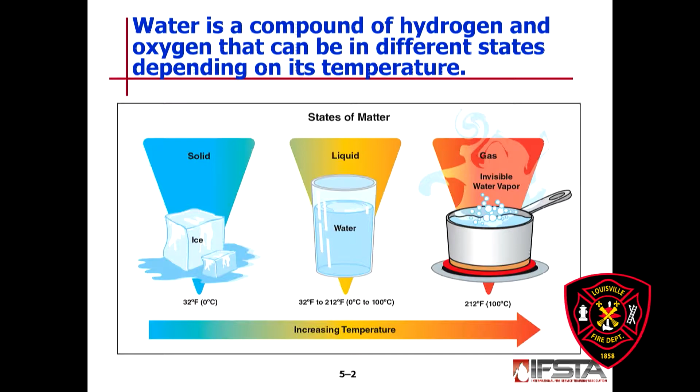What do we know about water? Why do we use water on fires? We know water per gallon is weighed at 8.3 pounds. We know we use water as a cooling mechanism and a smothering mechanism.

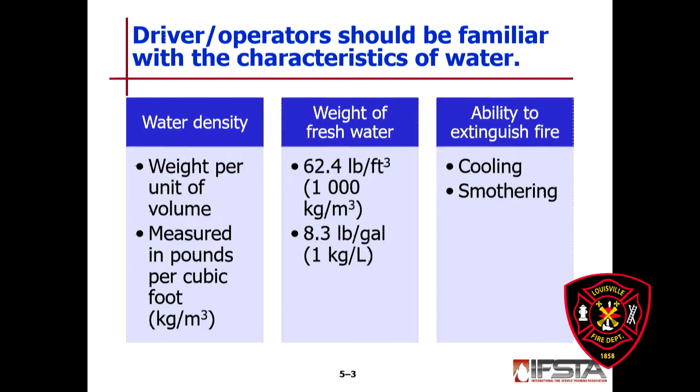What are ways that water can extinguish fire? We just went over that in the previous slide: cooling and smothering. Advantages of water.

We know water is generally inexpensive and we have lots of it. That's why we might use water. It has a greater heat absorbing capacity than many other common agents. We know that steam dissipates heat in well-ventilated rooms due to an increase in volume.

So why do we use water? Probably the most important thing is right here: it's generally inexpensive and readily available.

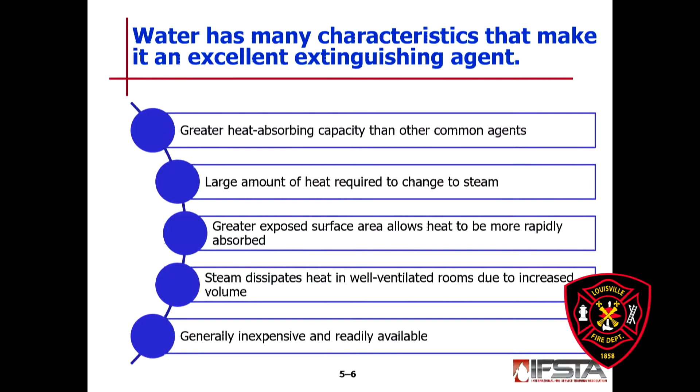So what are the disadvantages when we use water? We know that water is reactive with certain substances, i.e. magnesium. We know it may create operational problems or safety hazards in cold weather.

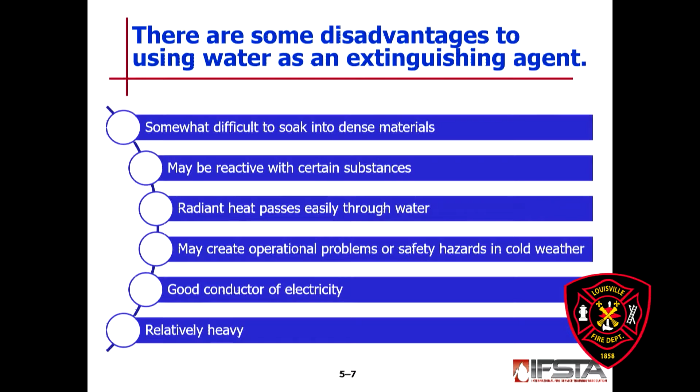So in the wintertime, we know our water can freeze. You flow in a lot of water, so you got ice in front of your structures, ice in the streets, ice around your apparatus, ice on your ladders and your elevated master streams. So we know that can be a disadvantage when water freezes.

And we know the water is heavy, so water can put a lot of stress on your buildings the longer the incident goes, making those structures not as stable as when we first got there. So advantages and disadvantages, we just covered.

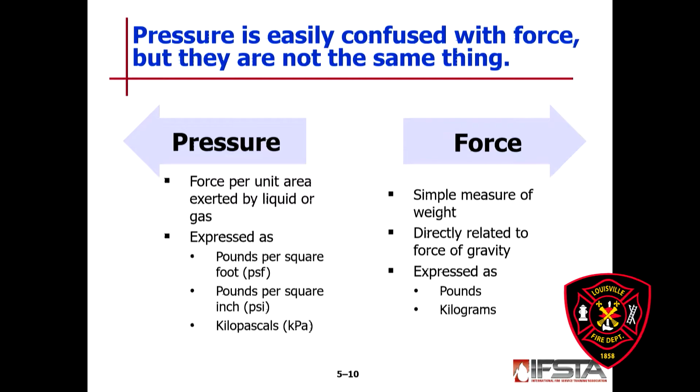Facts about water: pressure and velocity. Now, pressure and force are similar, but just slightly different. Pressure is a force per unit area exerted by the liquid or gas. It is measured in pounds per square inch, or PSI, and force is a simple measure of weight, directly related to force of gravity. So what we know here is pressure upon the fluid plus the size of an orifice that it flows through is going to determine the speed that water comes out of that hose or that pipe.

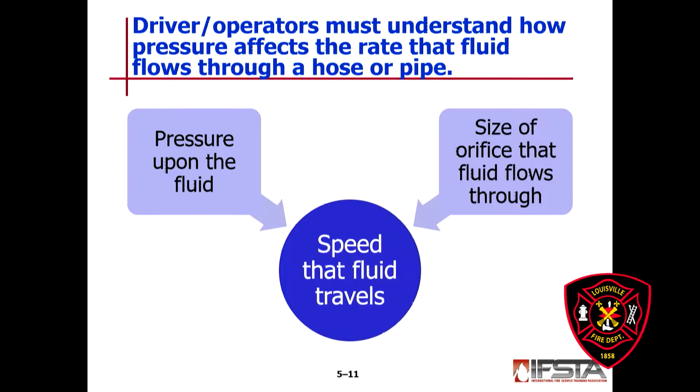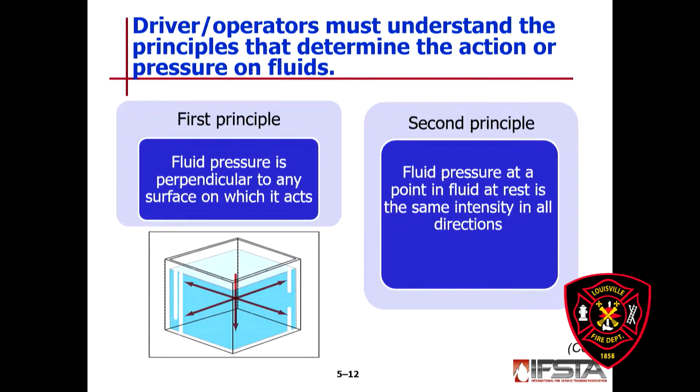Principles, these are found in your book. There are 4 principles, okay? Look over that. I'm not going to go over that right now, but it will be fair game for the test. These are principles. Basically, it tells you that whatever container or whatever the surface is, the water is going to take on that dimension.

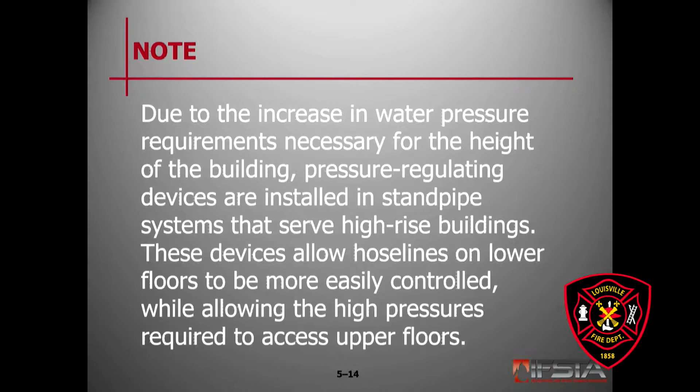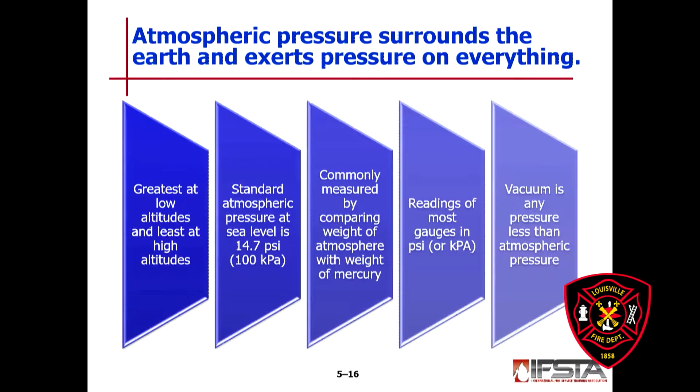6 principles, I'm sorry, not 4, 6 principles. All right, atmospheric pressure. We know that the atmospheric pressure here on Earth is 14.7 at sea level. Anything below that, a vacuum, and any pressure less than your atmospheric pressure is going to cause a vacuum, okay? It is greatest at low altitude and least at high altitudes. So atmospheric pressure surrounds the earth and exerts pressure on everything, absolutely everything.

We talk about head pressure. So in this illustration, we have our water supply up here, okay? It's 100 feet above our hydrant, okay? So we ask ourselves, how do we get to this hydrant pressure of 43.4 psi? Well, for every 1 foot of elevation, you're going to multiply that by 0.434, okay, and that will give you your hydrant pressure. So 100 foot times 0.434 is going to give you what you're going to get out of this hydrant if your water supply is 100 foot above your hydrant.

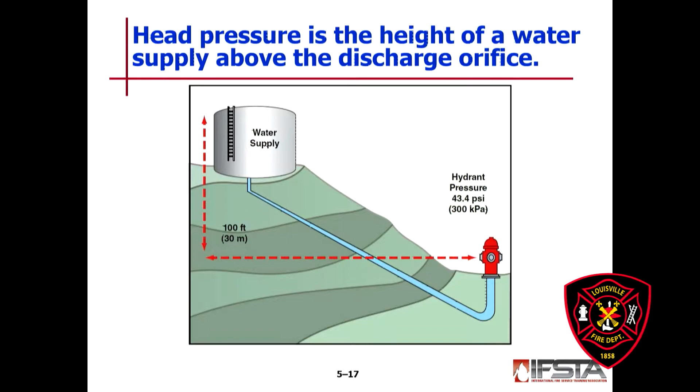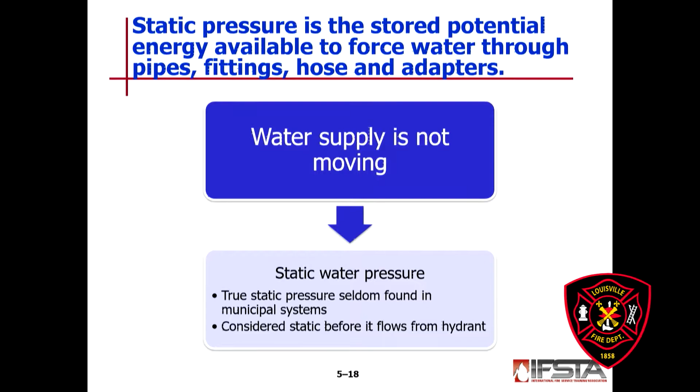Static pressure is a stored potential energy available to force water through pipes, fittings, hose, and adapter. Water supply not moving is what we call static pressure.

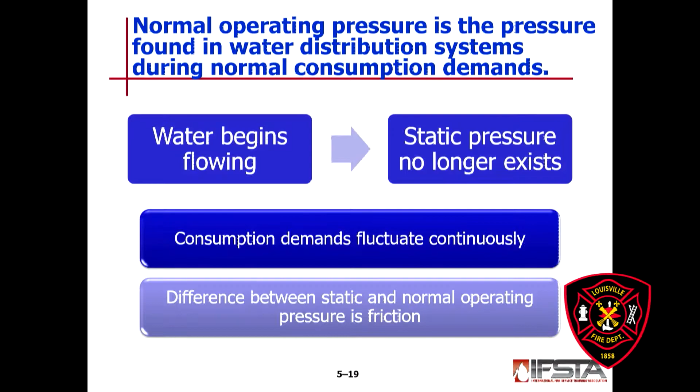Once water begins to flow, once you turn on a hydrant, turn on your faucet, once water begins to flow, it's no longer static pressure and it has to overcome friction.

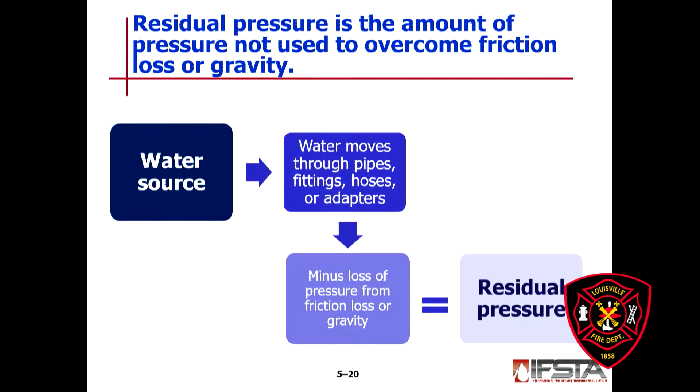Residual pressure is the amount of pressure not used to overcome friction loss or gravity. So you have a water source, and as water moves through the pipes, the fittings, and the hoses or adapter, you got to subtract the pressure from the friction loss or gravity, and after you do all of that, you will come to your residual pressure.

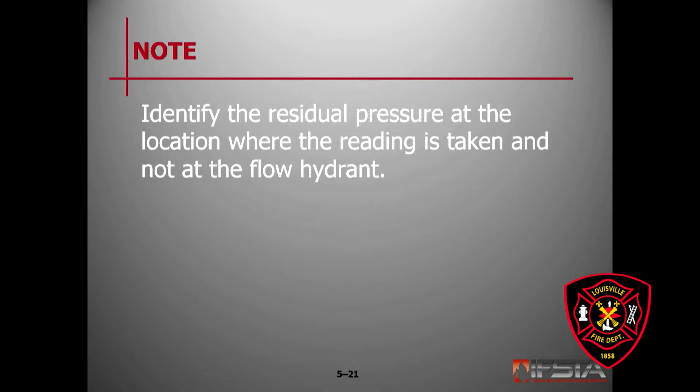Identify the residual pressure at the location where the reading is taken and not at the flow hydrant. So you won't, if you're trying to look for a residual pressure, you're not going to get that at the discharge of the hydrant. You will get that at the end of the nozzle once it flows through your hoses.

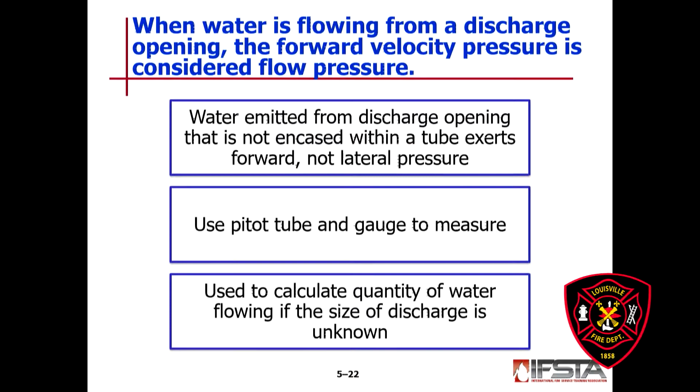When water is flowing from a discharge opening, the forward velocity pressure is considered flow pressure. You will measure that with a pitot gauge, and it is used to calculate the quantity of water flowing when the size of the discharge is unknown. When measuring the forward velocity of flow pressure using a nozzle, a smooth bore nozzle must be used with a pitot gauge.

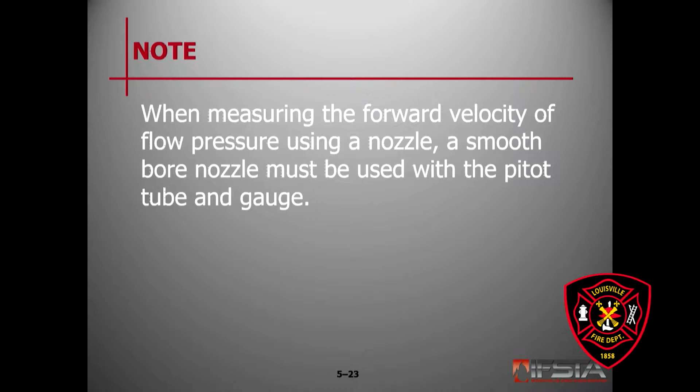Okay, in this slide, we're talking about elevation and altitude. The higher the elevation, or the higher the nozzle is going to be, then you're going to lose your pressure. And if your nozzle is below the pump, you're going to gain pressure.

And then in altitude, the higher the altitude, the higher you are up, the harder it is to produce an effective stream, versus the lower you are in altitude, it'll be easier to produce a good stream.

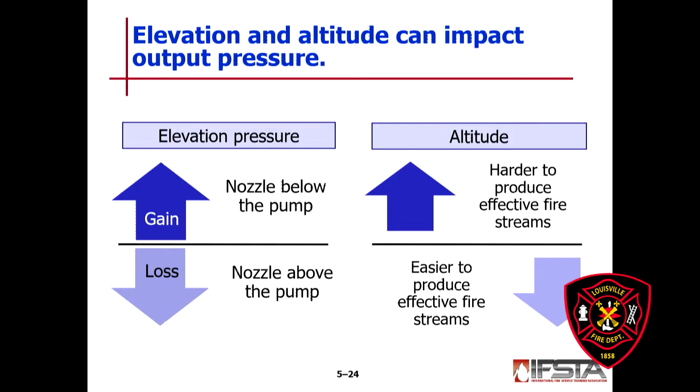A certain amount of pressure is lost due to friction as water moves through pipes, fittings, fire hoses, and adapters. So anytime water has to overcome anything—a pipe, length of hose, fitting, couplings, nozzle—pressure is going to be lost.

Different types of pressure, and talking about the principles of friction that are found in your book, there are 4 principles of friction. I'm not going to go into great detail about those. Those are found in your book, so please read them. I'll just read maybe the first and the fourth.

The first principle: if all other conditions are the same, friction loss varies directly with the length of a hose or a pipe. So if we have 2 pumpers into a hydrant, getting the same amount of hydrant pressure, goes through the pumps, out through the discharge at 200 feet of 1 3/4, everything remaining the same, you're going to get the same amount of pressure. If anything changes, that pressure will be different for each of them.

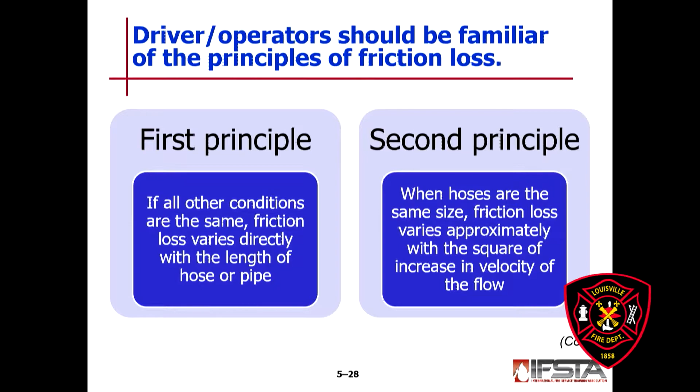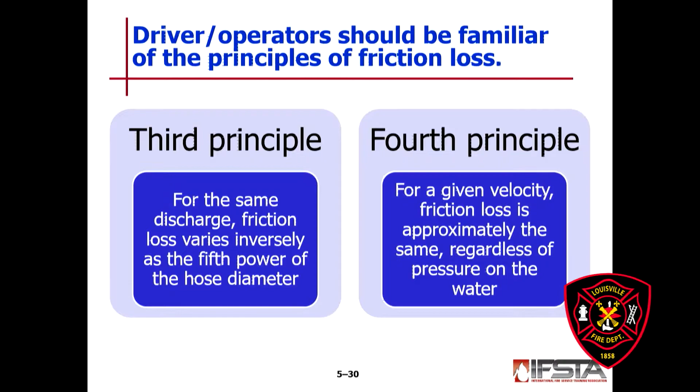Fourth principle: for a given velocity, friction loss is approximately the same regardless of the pressure of the water.

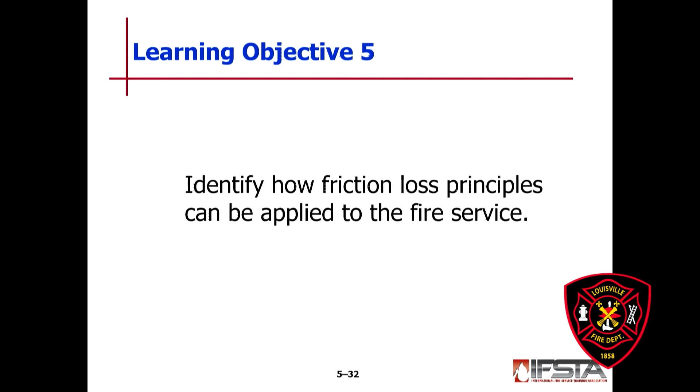Identify how friction loss principles can be applied to the fire service. So the volume of water supplied into a fire hose under pressure is going to equal the volume of water expelled from the nozzle. That's pretty self-explanatory.

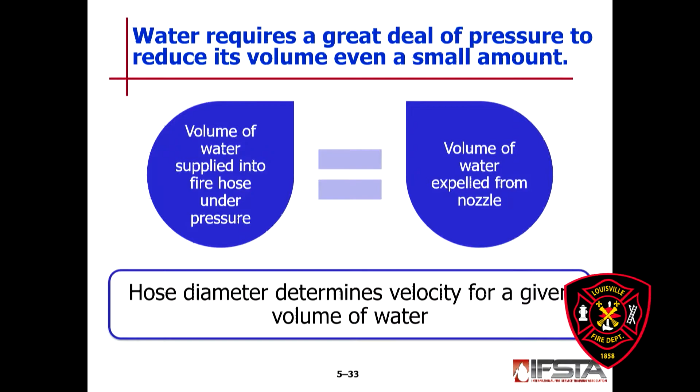We get water in, we get water out, it's going to be the same volume. Hose diameter determines velocity for a given volume of water. So the bigger the hose, the more water we'll get. That's basically what that slide is saying.

We need to be aware how friction loss and water pressure are affected by hose length and nozzle use. Friction loss increases as the length of the hose lengthens. So the longer the hose, the longer that water has to overcome friction loss.

Flow pressure is always greater at the source of supply than at the lowest or farthest point of the system. So if my pumper's here with 100 feet of hose, then I turn on the nozzle, my flow pressure is going to be greater than if I had 500 feet of hose and I turn on the nozzle and take my pressure there.

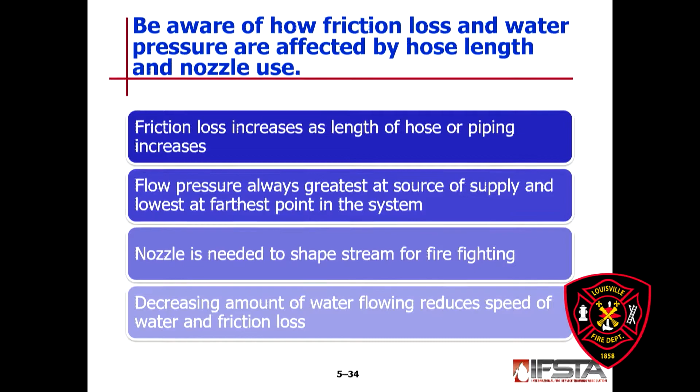A nozzle is needed to shape the stream for firefighting water. We know that. And decreasing the amount of water flow reduces the speed of water and friction loss.

What will happen then is you will either need to use a Siamese or use two different hoses to overcome the friction that will be going through that system.

Friction loss in a system can be reduced in several ways. We talked about this—hose length. We can reduce the length of the hose. Oh, excuse me.

Too fast for myself. You can reduce the length of the hose or you can increase the diameter of the hose. So the bigger the hose, the less amount of friction you're going to have. That's there. Or watch for sharp bends or kinks.

So we know that sometimes hose gets kinked in the yard, in the door, or wherever. So always look down, especially if you're coming in behind the hose man or the nozzle man. Look down, unkink hose if you see a kink, because it's going to affect the amount of water he's getting at the end of the hose.

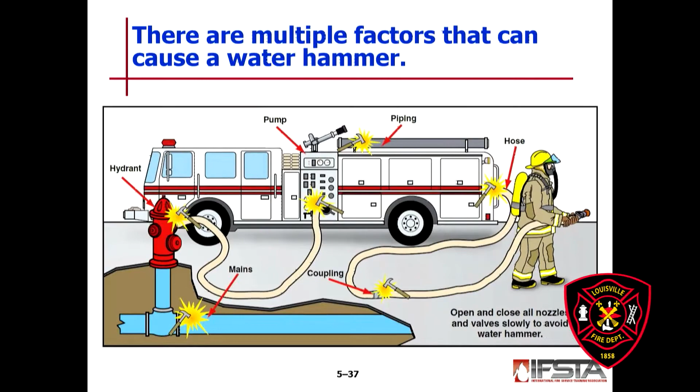There are multiple factors that can cause a water hammer. When we're talking about water hammer, we're talking about opening or shutting any kind of gate or discharge, and we know that can be found here at the nozzle, here at the discharge, or here at the hydrant. This picture illustrates different ways where water hammer can occur. We want to try to reduce that as much as possible.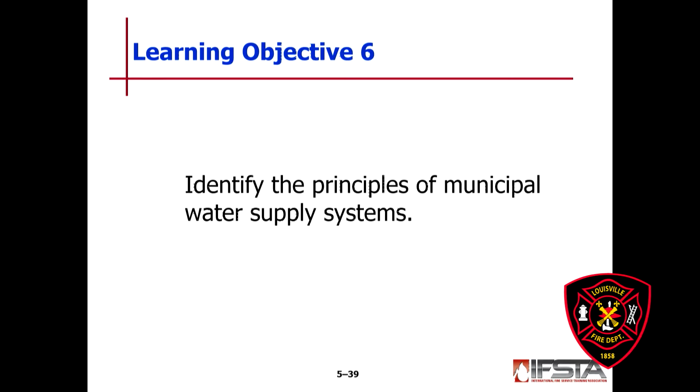Identify the principles of a municipal water supply system. We know that in this city, at least, we have the Ohio River, and so that is going to be our main water supply.

The fire department and local water department get together, some engineers get together, and they plan where the mains are going to be in the city, where hydrants should be placed, how far apart they should be placed. In your first and second district, they're more closely together. Once you get out in the fourth district, those hydrants are a little bit farther apart, but that is above our pay grade.

We really don't determine that, but just be aware of that.

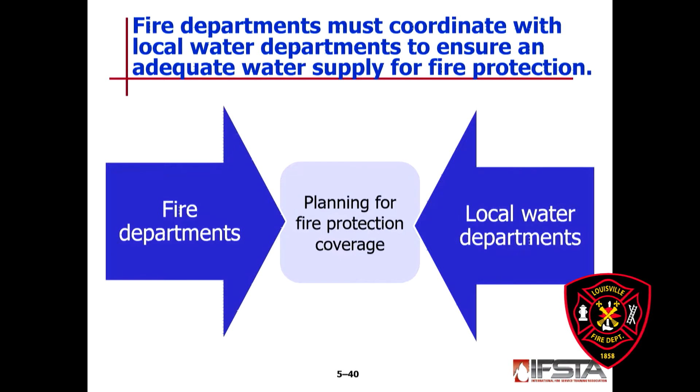A municipal water system may be supplied by groundwater, surface water, or a combination of both. When we talk about surface waters, we mean rivers or lakes - for us, that river is the Ohio.

When we talk about groundwater, we're talking about cisterns, water wells, or water producing springs.

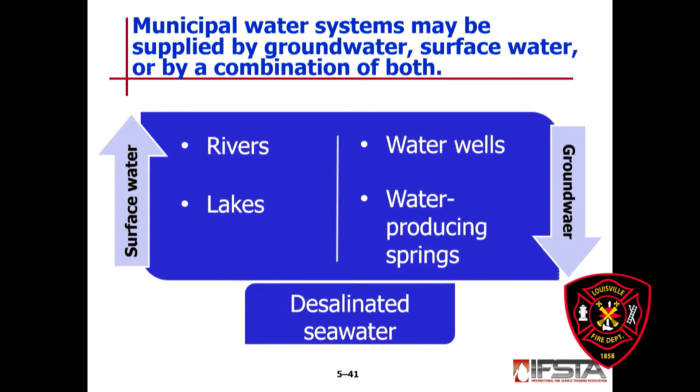So now the question becomes, how do we get the water from the river to our hydrants? There are three methods of moving water in a system: direct pumping, the gravity system, or a combination system.

In the picture illustrating the direct pumping system, you have the source, which would be the river here. It comes into the filtration, goes into the pumping system, and out through the city.

This illustrates the gravity system, where your water source is above all of this. It's fed by gravity, comes down into your filtration or treatment center, and then out through your distribution system.

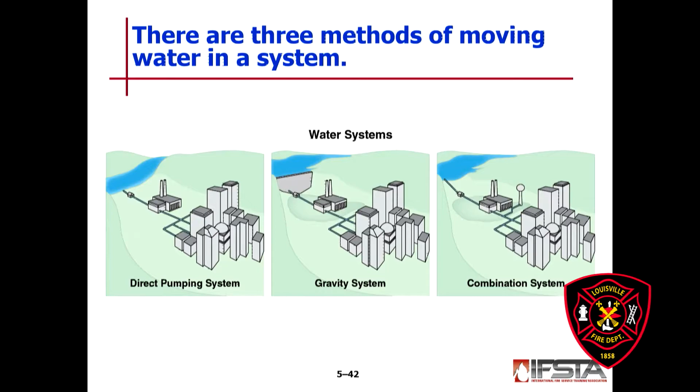Here you have an overhead storage tank. The water isn't as high as in the gravity system, but in a combination system, water comes down slightly, goes into your filtration system, and then out through your distribution system.

Water may be stored in an elevated reservoir to ensure water supply when the system is inoperative. In this last picture, you see the elevated storage.

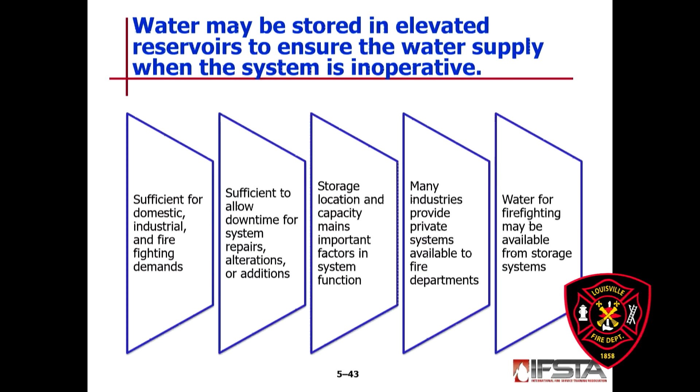These are found maybe in your chemical plants or in some of your bigger companies, where there may come a point where our water system becomes ineffective or not operable.

You will have these, and this water can be used for firefighting. It can be used for production of whatever they're making at that particular plant or company, or it can be used for toilets and things like that.

The fire department must be aware of situations with water treatment plants that could affect the water supply. We've got to plan for a potential shortfall.

With the river here, I don't think we have to plan for that much, but we also have to plan for maintenance failure, natural disasters, power loss, and of course, if there's a fire.

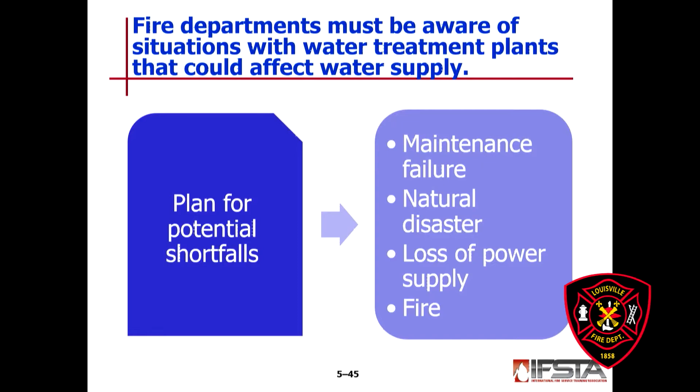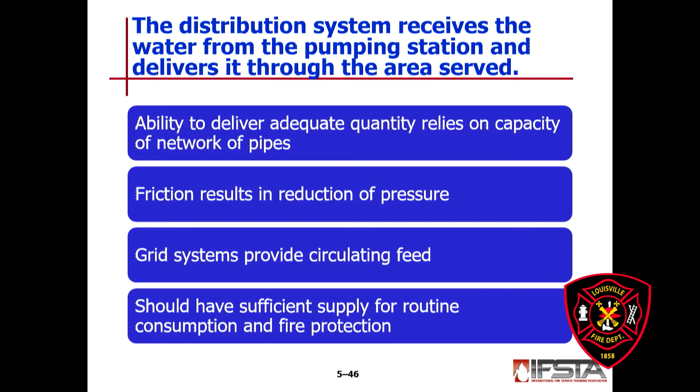The distribution system receives the water from the pumping station and delivers it through the area that it serves. The ability to deliver adequate quantity relies on the capacity of a network of pipes, mains, or grid systems.

Valves should be operated at least once a year and should be located at frequent intervals throughout a grid system. Louisville Water Department throughout this city has large grid systems.

You should get to know some of those in your district and area. They're electronically monitored, so if we have a main break on Eastern Parkway - which we've had a couple years ago - or even down on Main Street, or in the 2nd District, I think we had one over by Shelby and Oak.

When something like that happens and there's an increase or decrease in pressure, I'm sure some alarm or light goes off in their control center.

They should then be able to use their computer system to pump water from other grids to make sure areas are getting service.

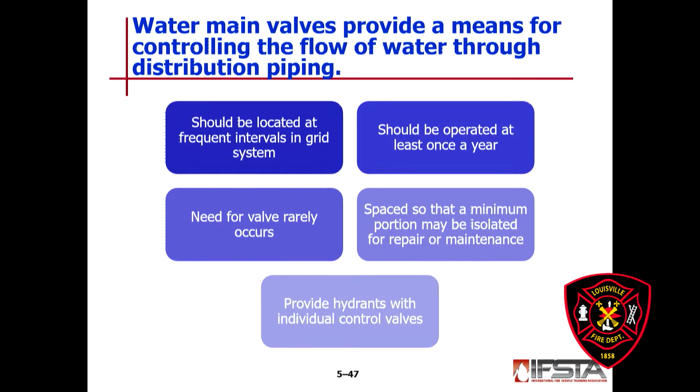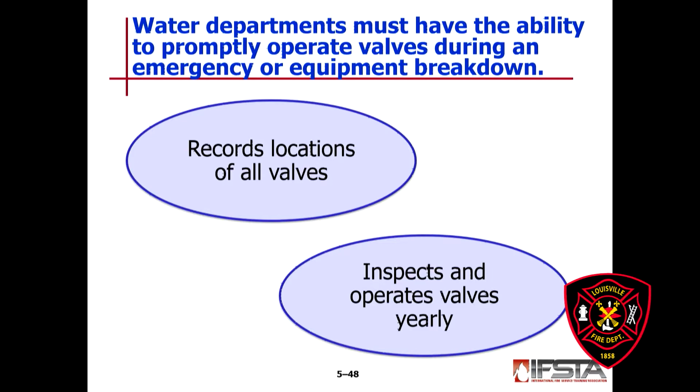Or they can shut off water in the area where the break is, so it's not feeding and causing more damage than the break itself. Water departments must have the ability to promptly operate valves during emergencies or equipment breakdowns.

Valves for a water system are broadly divided into two main types: indicating valves, the two types we should be familiar with being the post-indicator valve and the OS&Y valve.

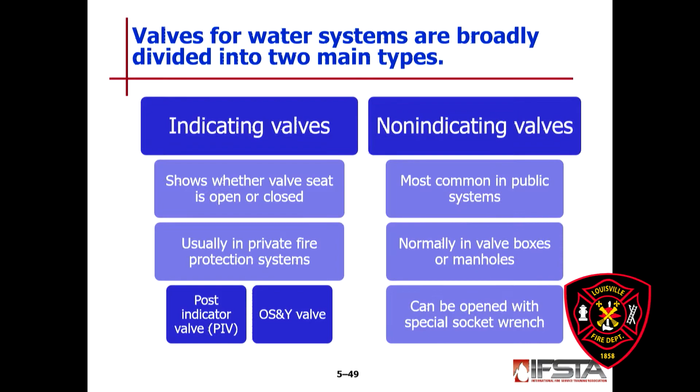And then you have non-indicating valves, most of which are underground and may be found in boxes or manholes.

Control valves in a public water distribution system are generally gate valves - rising stem valves, which are similar to our OS&Y valves, and non-rising stem valves.

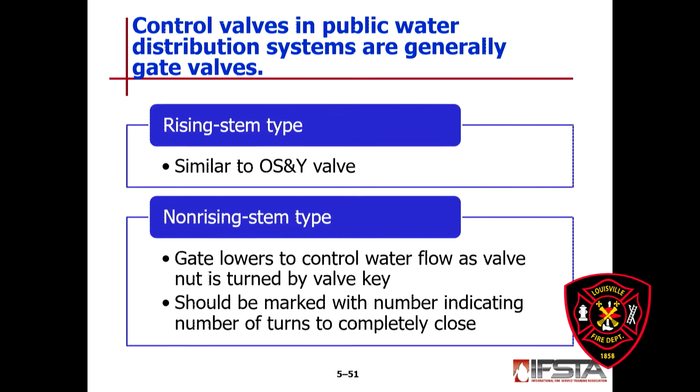Proper valve installation and maintenance can affect fire department operations. It's often necessary to close off one or two hydrants while a single break is being repaired.

This relates to properly installing valves, and there's less advantage if all valves are not maintained and kept fully open.

High friction loss can be caused by partially open valves. Closed valves may not be noticeable during ordinary domestic water use, but it becomes difficult to obtain water for firefighting.

So if someone in the city is working on a valve and finishes but doesn't open it back up completely, you may not notice that if you live in that neighborhood and you're taking a shower, brushing your teeth, or watering your grass.

But if your house catches fire and we need to open a hydrant or several hydrants in that area, it will be noticed with the reduced pressure of what the hydrant is giving us. That's when you would notice something like that.

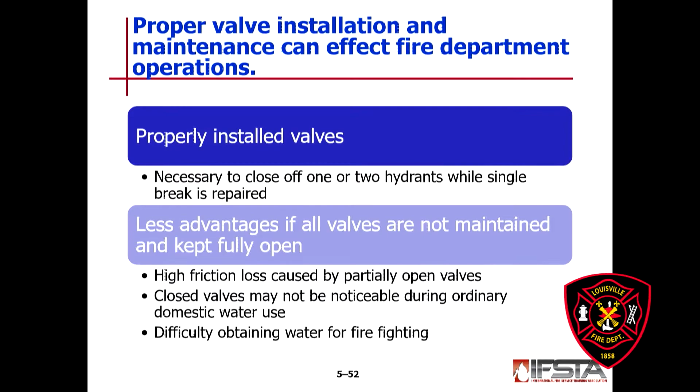Underground water pipes may be made of many materials and are suited for a variety of conditions and pressures. Especially in our city, we have a lot of old mains and pipes running through the city. They can be made of cast iron, asbestos cement, steel, plastic, or concrete.

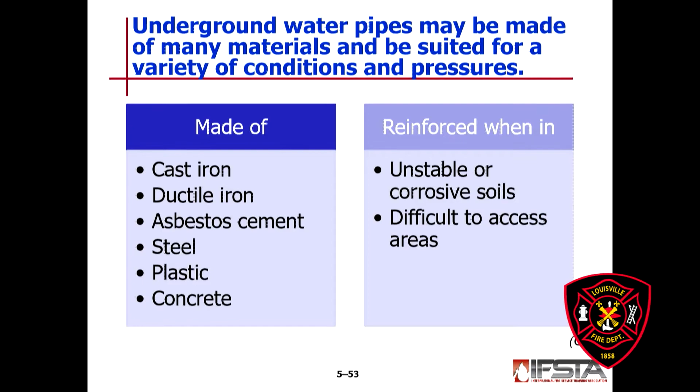They are reinforced when it's unstable or corrosive soil, or when it's difficult to access the area. Underground water pipes may be made of many materials and suited for a variety of conditions and pressure.

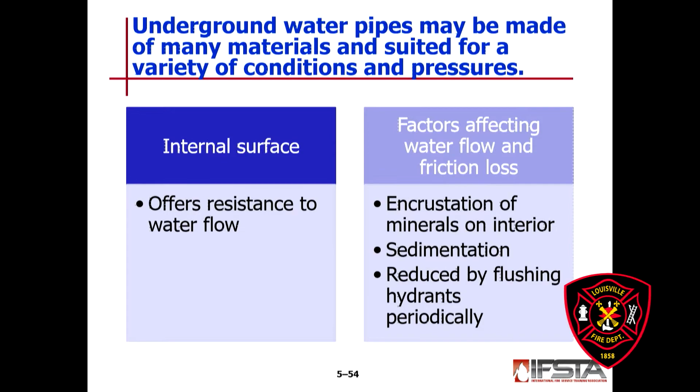The internal surface offers resistance to water flow, and factors affecting water flow and friction loss include encrustation of minerals and sedimentation, which is reduced by flushing hydrants periodically. So these are things that underground water pipes may be made of many materials suited for a variety of conditions and pressure. Flushing hydrants, we don't do that. I think out in the county, they're responsible for doing that in their fire district.

Rates of consumption can be used to determine the adequacy of water in a distribution system. When we talk about rates of consumption, we're talking about the average daily consumption, the maximum daily consumption, and the peak hourly consumption.

The average daily consumption is the amount of water used per day over a period of 1 year. The maximum daily consumption would be the maximum amount of water used during any 24-hour interval during the time of 3 years.

And then your peak hour consumption would be the max amount of water used in any 1 hour interval over the course of a day.

So when we're talking about the peak hourly consumption, it's normally going to be higher in the morning, maybe between 7 and 10 a.m., when people are waking up, brushing their teeth, taking showers, getting ready for work. And in the evenings, maybe between 8 and 11, people are doing the same thing, taking showers, brushing their teeth, getting ready for bed. That's when your peak hour of consumption will take place.

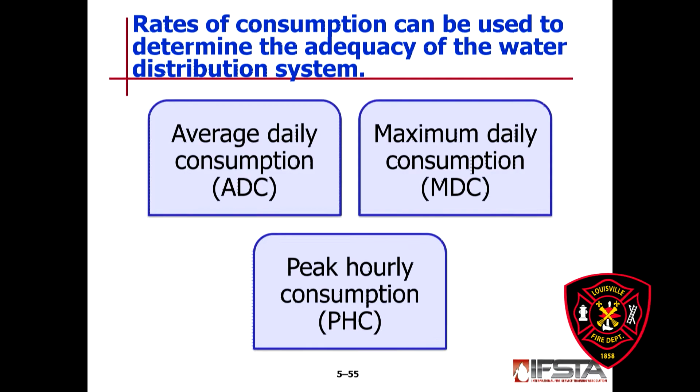Various ways of moving water through a system we talked about. Describe a private water supply system. We know the purposes are some purposes strictly for fire protection. It can be used for sanitary and fire protection and manufacturing. We, as a department, would not use a private hydrant unless...

...it's a last resort, pretty much. We don't know if they're serviced. Most of the time they're not serviced by the city, so we don't take a chance on using a private hydrant. Sometimes these private systems are used in manufacturing for whatever is going on at their property, or it can be used also for sanitary and/or fire protection.

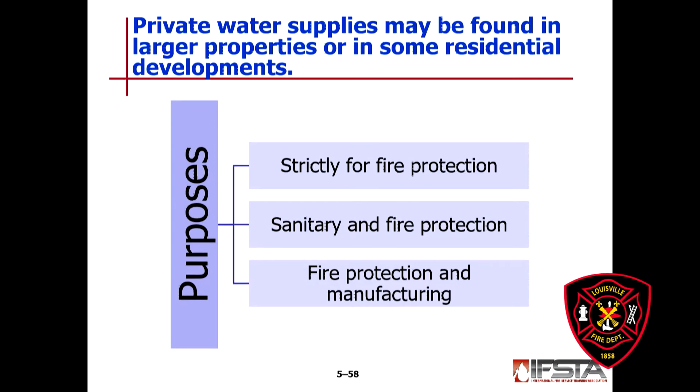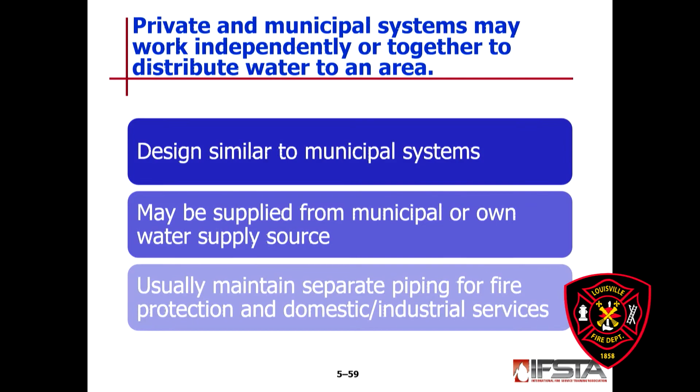Private and municipal systems may work independently or together to distribute water to an area. They're designed similar to municipal systems. They may be supplied from a municipal or their own water supply source, and usually maintain separate piping for fire protection and domestic and industrial services.

Fire departments should make arrangements to augment private water supplies if necessary. So if all else fails, we can draft from a reliable static water source close to the scene. We need to know where our swimming pools are, where large cisterns may be.

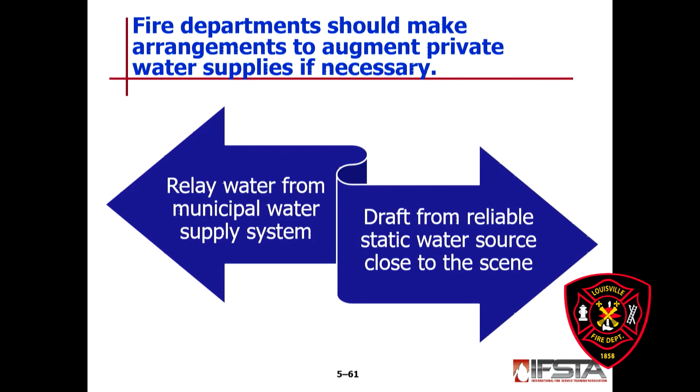If things get really bad, we need to know if we have enough hard section hose to draft from the river. Things would have to be really, really bad.

What are the purposes of a private water supply system? We went over that in a previous slide.

So in summary, pumping apparatus driver operators must understand the properties of water and how it functions as an efficient and economical extinguishing agent. We know we have plenty of water in this city because we have a river.

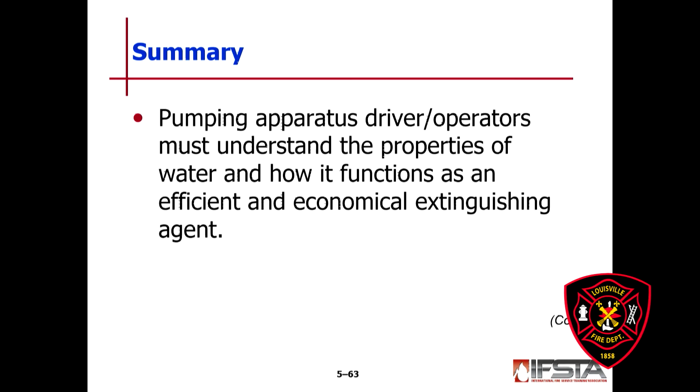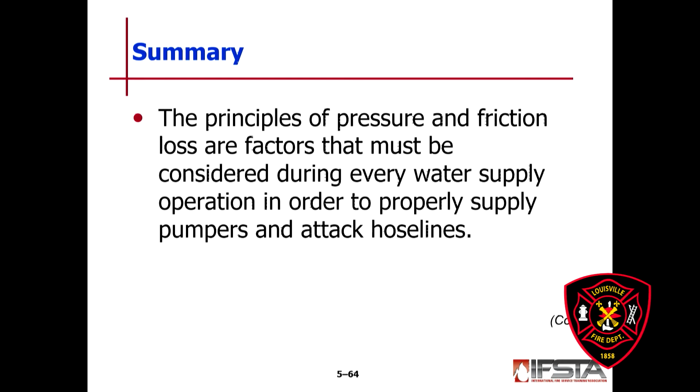The principles of pressure and friction loss are factors that must be considered during every water supply operation in order to properly supply pumpers and attack hose. So we know anytime water goes through a hose, an orifice, or a pipe, it's going to have to overcome friction.

Pre-incident knowledge of the water distribution system serving a local jurisdiction, and an understanding of the design and proper maintenance of a municipal or private water system, is vital to providing needed water flow and will aid driver operators in planning for large-scale firefighting operations.

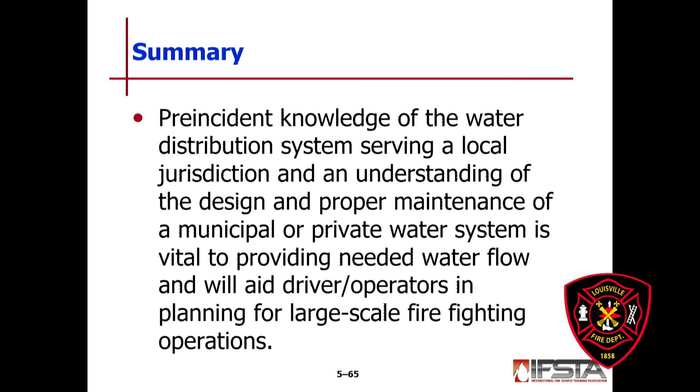So we need to have at least a working knowledge of where our water is coming from, our grid system, and where our hydrants are. That's why we do street and water exams, knowing where our first hydrant is, where our second hydrant is, having a working knowledge of our first alarm district and where our water is.

In the first, second, and even the third district, our hydrants are pretty readily and pretty close together. As you get out into our fourth district, our hydrants are further apart. So having a working knowledge of that will aid and help you in case of a fire incident.

So that's chapter 5 of water supply systems.